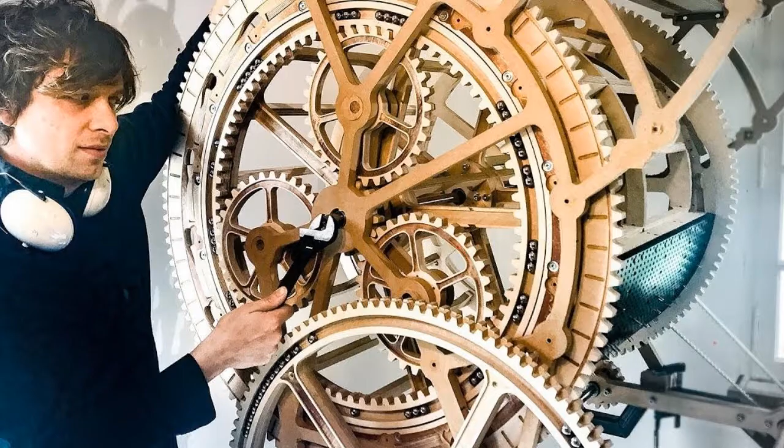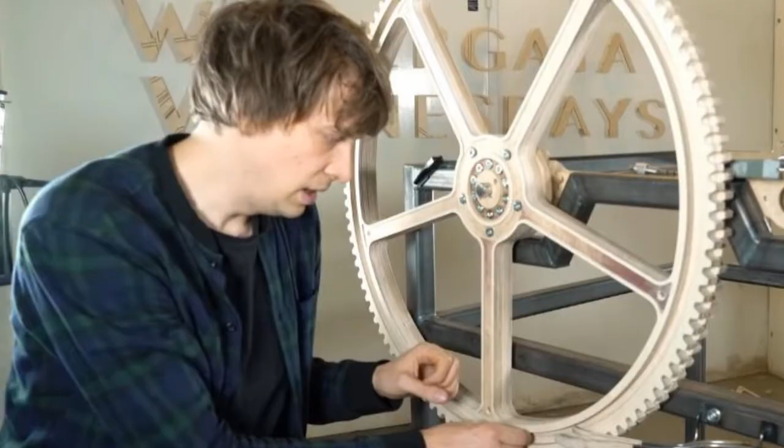A man named Martin Molin is creating a music machine, and he cut gears out of plywood. To make them more decorative, he cut along the spokes of the gear to the depth of the first layer of plywood in order to expose the glue layer, thereby creating gears with some color and texture. This video shows how you can do that type of decorative cutting with MillWrite.

On the drawing screen is the gear and spokes that I created in the previous video. To make this gear more similar to Martin's gears, I will change the spokes to 5 wedges, and I'll alter a few other parameters. Although I will leave the spokes with a taper because I think that looks better, and it might create a stronger gear also.

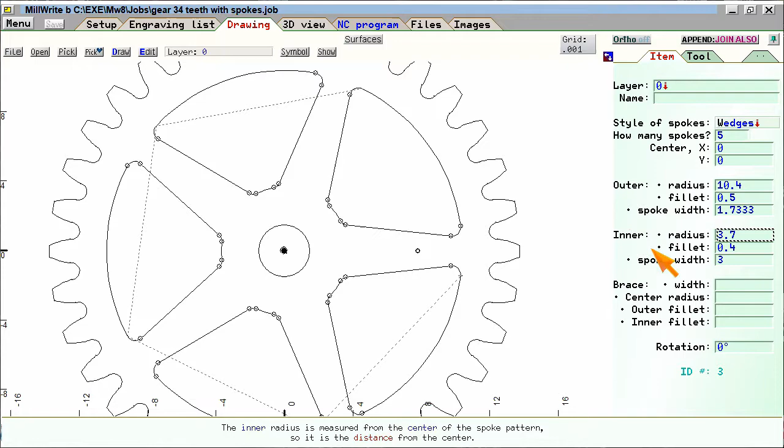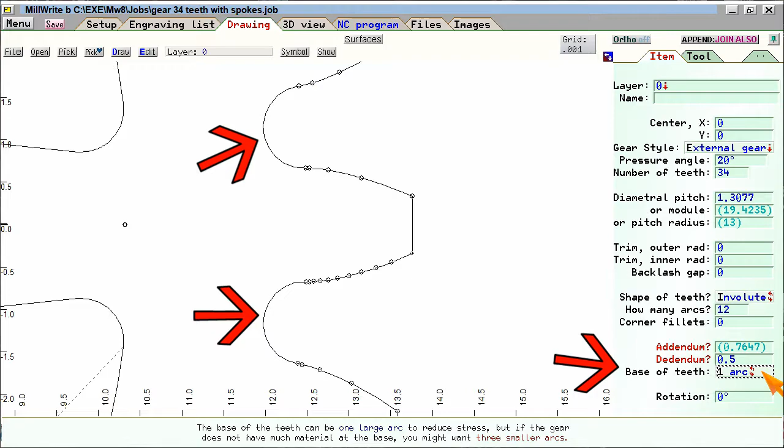I will also make a change to the gear that you might want when cutting a gear out of soft materials like wood. I'll zoom in on the teeth and then change the base of teeth from 1 arc to 3 arcs. As you can see, as I switch this option back and forth, switching to 3 arcs leaves more material around the teeth.

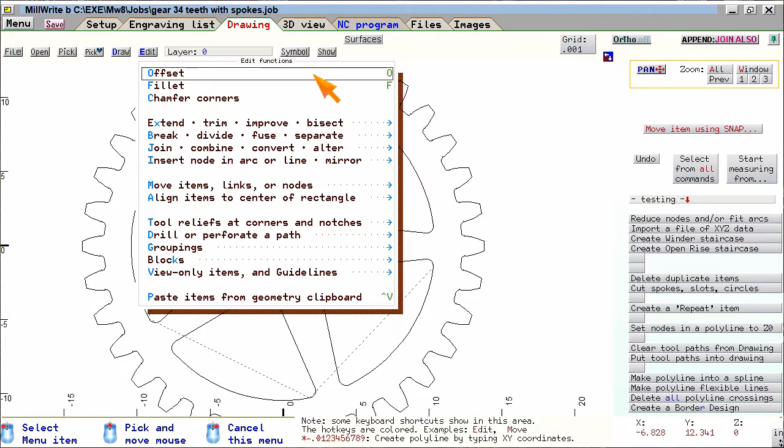Now to create a decorative cut inside the spokes. The easiest way to do this is to make an offset of the spokes. To do that, I can click the Edit button at the top of the drawing page and select the Offset function. At the right edge of the menu is the letter O, which shows that the letter O is the hotkey for that function. Therefore, I could have pressed the letter O on the keyboard to bring up the Offset function. The top of the screen changes and offers the option of offsetting entire polylines or individual links within polylines.

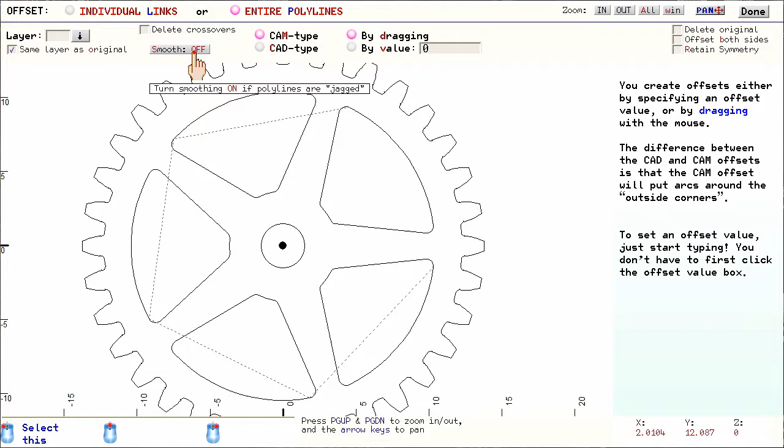I want to offset the entire polyline, and I want the CAM type of offset. I do not need to worry about deleting crossovers or turning on the smoothing option because these are precise drawings as opposed to the sloppy geometry that we get when we do those raster to vector conversions in which an image is converted into geometry. I will put the offset on a different layer, and I'll give the layer a name such as offset of spokes.

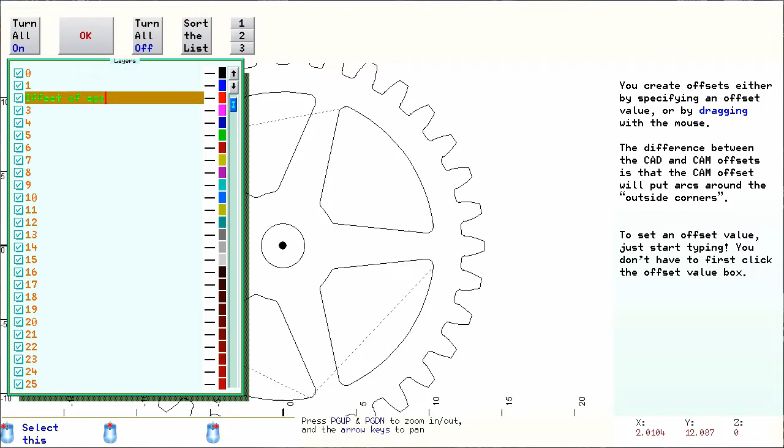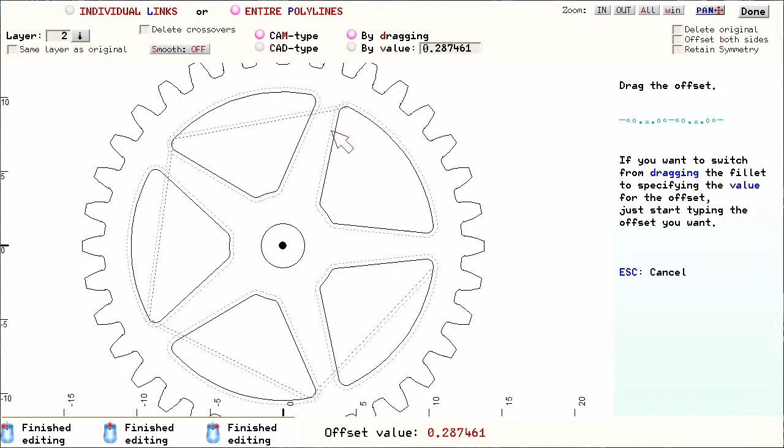I will create the offset by dragging it rather than by value because I don't know the value I want for the offset. So I click the spokes and then move the mouse, and you can see that it is dragging an offset. I can zoom in or out with the scroll wheel while I am doing this. As I drag the offset, the value is displayed at the top of the screen.

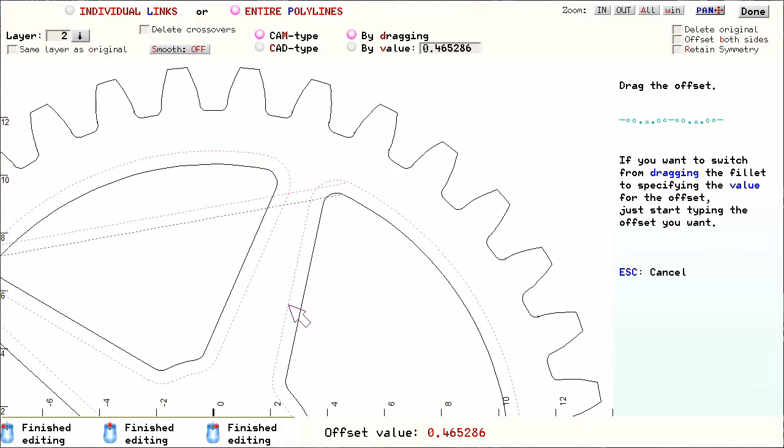If I decide I want a specific value, I can do it while I'm dragging the offset simply by typing the value. For example, if I decide I would like the offset to be 0.4 inches, then I type 0.4. As soon as I press the decimal point key, a window pops up to ask me for the offset value, and then I can press the 4 key and then the Enter key. Then the offset is created at exactly 0.4 inches.

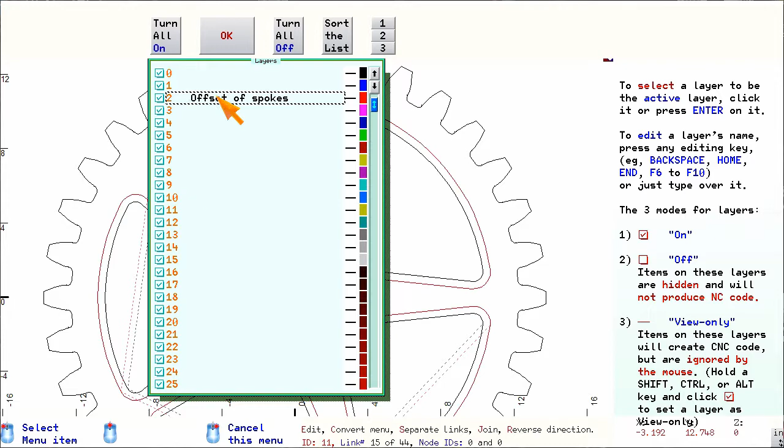In order to make the tool cut in this area, we need to create a boundary to tell the tool where it must stop cutting. I will create a circle to specify the outer boundary. I want the circle on the same layer as the offset, so I'll set the active layer to the offset of spokes. Then I click the right mouse button while the mouse is not hovering over anything, which brings up the drawing menu, and I'll pick the option to draw a circle.

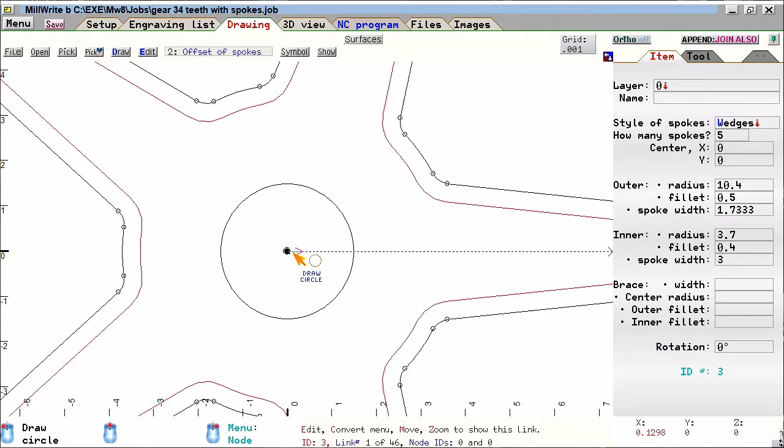Then I click the center of the spokes and drag a circle out to where I want the tool to stop cutting. This looks okay. Now I will create a smaller circle to stop the tool from cutting all the way to the center. So I click the center of the spokes again, but this time I make the circle stop about here.

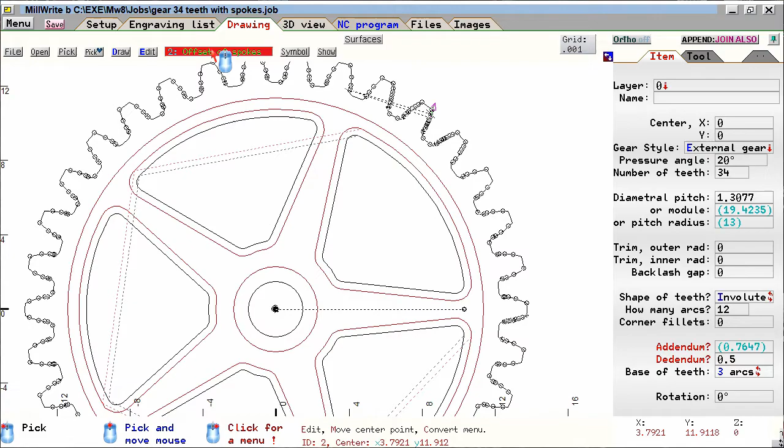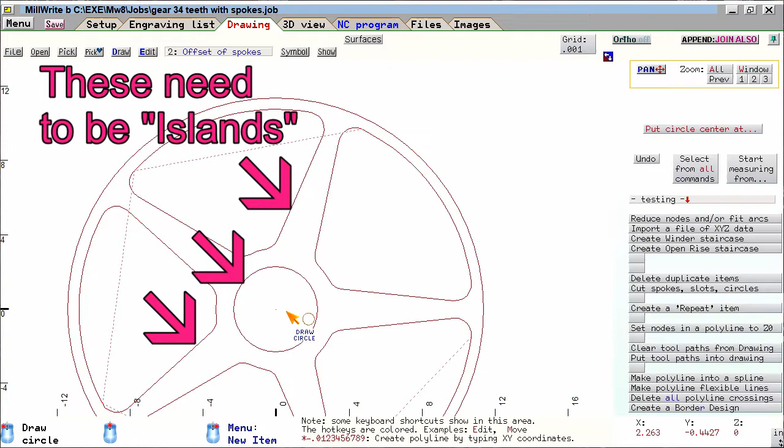The spokes and the gear are on layer 0, so I will turn that layer off temporarily to help you understand what I'm doing. I want the tool to cut within this area, but not inside these 5 wedges. To do that, these 5 wedges need to be set as an island so that the tool avoids them. The center circle also needs to be an island so that the tool avoids cutting into it. The outer circle needs to be set as a pocket. So I will let the mouse hover over the outer circle and then set the cam operation to pocket.

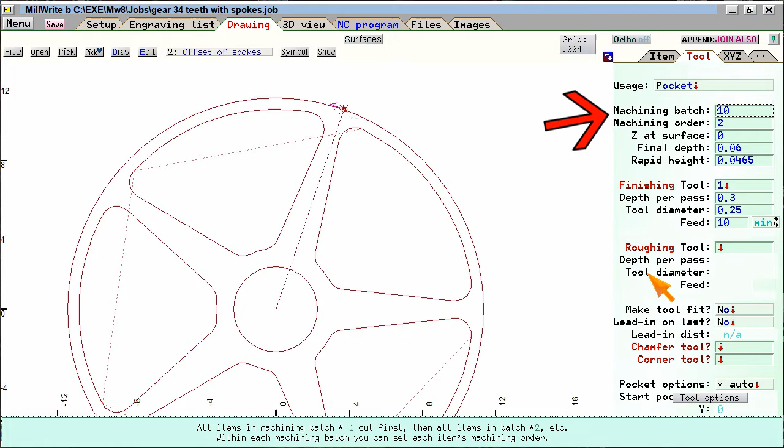I will select the same 1/4" tool that I chose to cut the spokes and gear. However, the depth will only be as deep as the first layer in a sheet of plywood, which I will assume is 0.06 of an inch. I want the CNC machine to cut this pocket before it cuts the shaft hole, wedges, and gear, so it needs to have a machining batch with a lower number than the other items. Since the shaft hole is set to a machining batch of 10, I will set this to a machining batch of 5.

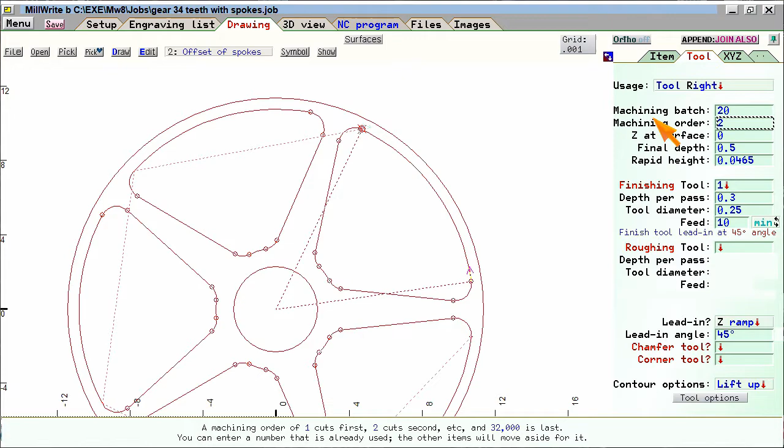Now I need to set the circle and wedges to islands. In the previous video, I showed that you can switch from one item to another by moving the mouse back into the drawing, clicking one time, and letting the mouse hover over the other item, and then sliding the mouse back over to the right side of the screen. Going back and forth like this is a bit of a nuisance, however. There is an easier way to switch from one item to the next.

I will go back to this outer circle. Then I press and hold down a Shift key on the keyboard, and a menu appears on the bottom of the screen to remind me that while I am holding down the Shift key, if I use the mouse scroll wheel or the page up or page down keys, I will jump to one of the other items that is visible in the drawing. So I turn the mouse scroll wheel and the outer circle becomes unselected and the spokes have been selected.

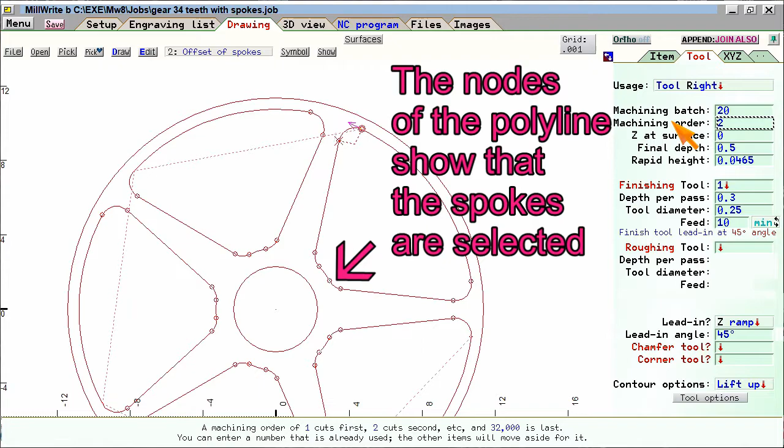I can now set this to be an island, and I give it a machining batch of 5 because it has to match the batch of the pocket so that MillWrite knows that the pocket and island belong together. I could now press the Shift key down again and use the mouse scroll wheel to jump to the inner circle, and then set that to be an island and give it a machining batch of 5.

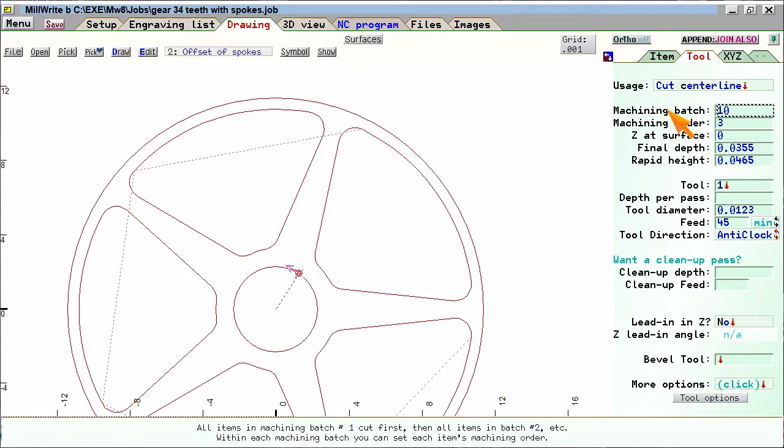But another method of giving items the same machining parameters is to use the Copy Cam Settings function. I could set one of these user-defined buttons to Copy Cam Settings, or I could click the Select from All Commands button, and the first option in the list is to copy cam settings to others. So I pick that function. I make sure the machining batch option is checked at the top.

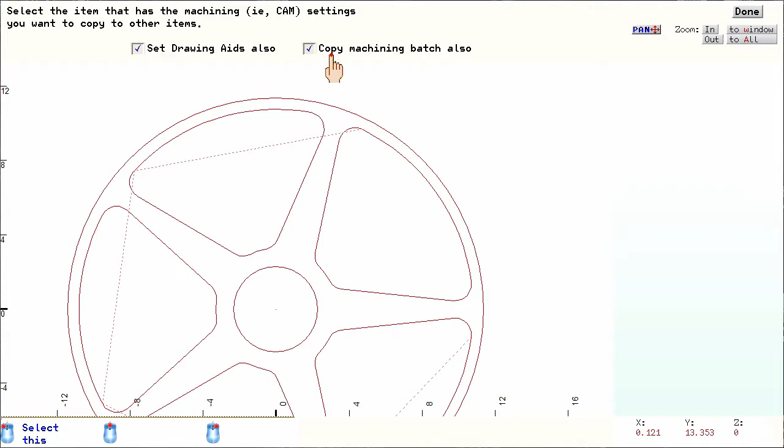The message at the top of the screen reminds me to select the item that has the cam settings I want to copy. So I move the mouse over the spokes, and along the right side of the screen I can see that it has been set as an island and machining batch 5. So I click the left button to let MillWrite know I want to copy those settings.

The message at the top of the screen changes to tell me to click the items I want to have the same settings, or draw a box around them if I want to set a bunch of them. So I click the circle, and now it has been set as an island and machining batch 5.

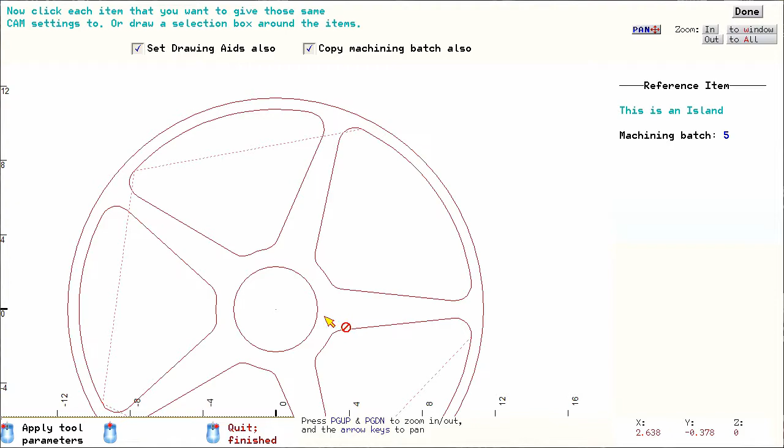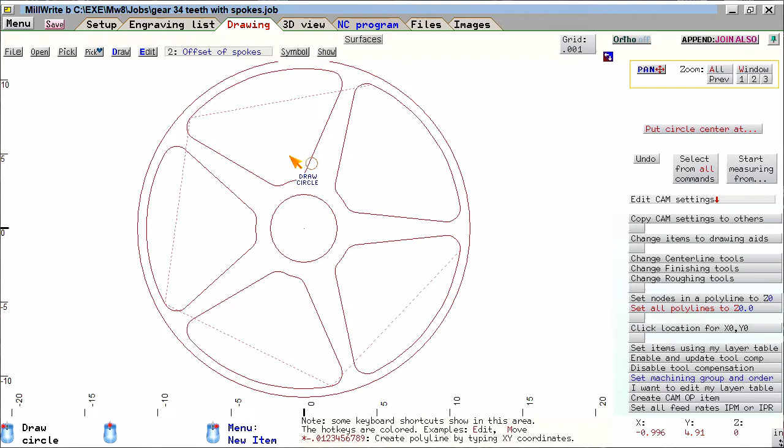Cutting this gear out of a piece of wood and cutting 5 wedges into it is going to create a total of 7 independent pieces of wood, which must be held down on the table. One option is to drill holes through each of the 5 wedges and through the gear, and then bolt the sheet of wood to the CNC table. However, there is another method, and that is to place holding tabs on the pieces to hold them together.

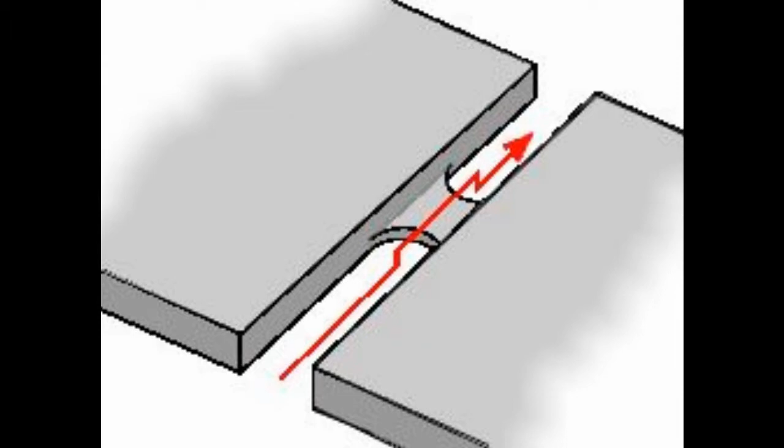When the CNC program has finished cutting, all 7 pieces will be cut out, except that there will be some small tabs of material holding the pieces together. You'll have to cut those by hand to release the pieces. The tabs will cause the tool to rise up in the Z-axis for a short distance, move over in the X and Y a short distance, and then drop back down, thereby leaving a small piece of material to hold the pieces together.

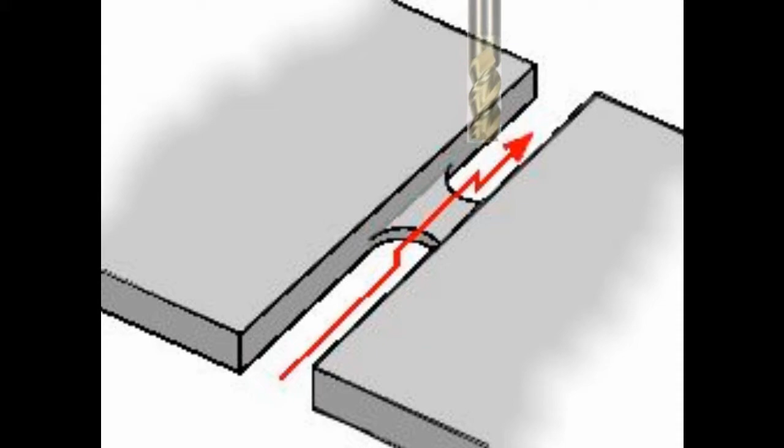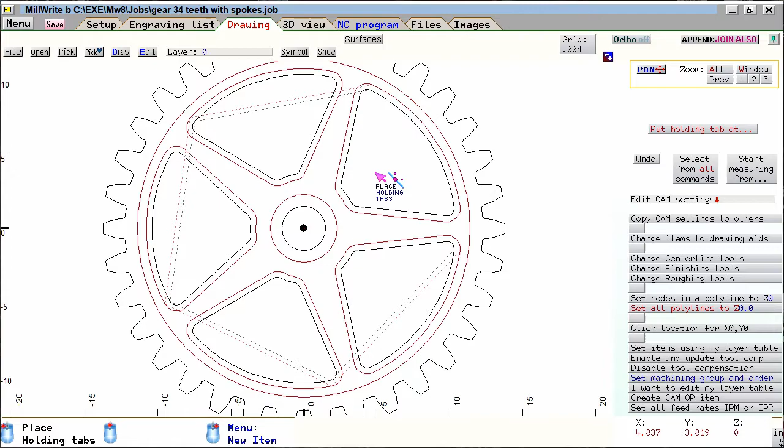To put these holding tabs on the part, click the right mouse button when it is not hovering over anything in the drawing, and the menu will appear. Select the option to Create Holding Tabs. Then click the location on the wedges where you want a tab to be. Wedges that are this large might need 2 tabs. I will also put a tab at the center of the hole, and I'll add 3 tabs to the gear.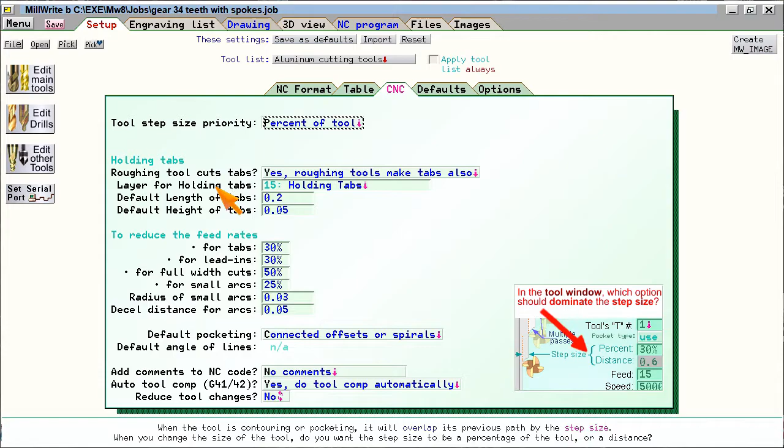The size of the tabs are specified at the setup page under the CNC tab. Here is where you set the default length in X and Y and the default height in the Z axis. At the drawing page, you can override the height and length of the tabs if you discover that a particular tab needs to be stronger or that it can be reduced in size.

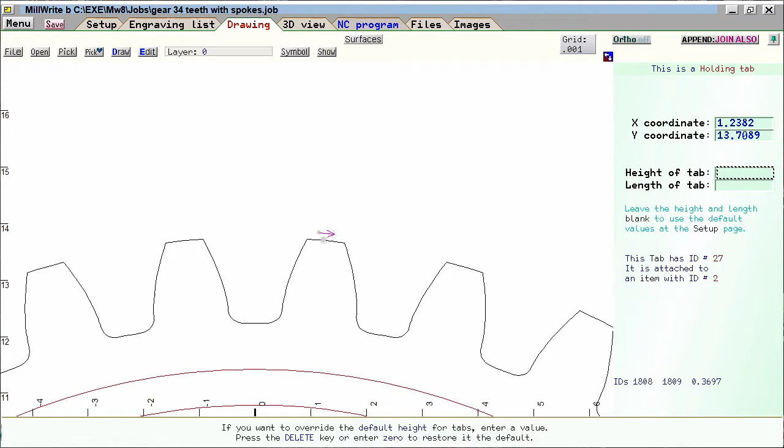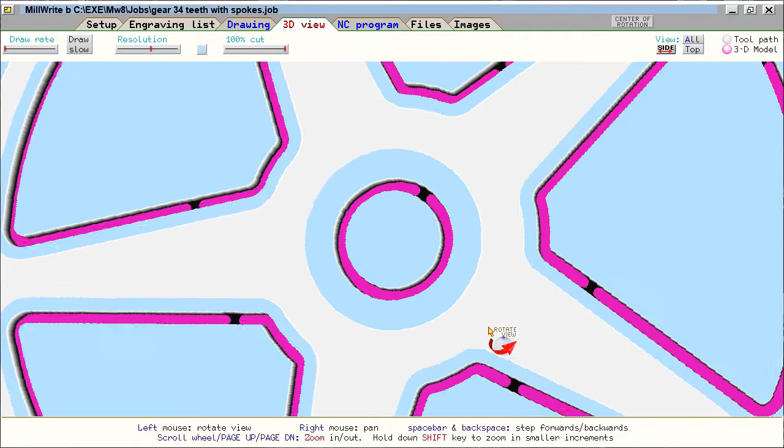After the tabs have been created, you are ready to look at the 3D view of the toolpath. You can see the tabs if you zoom in. You can switch to the 3D model to get an idea of what the tool is going to create. The pinkish color shows where the tool has reached its deepest level, and the tabs will show up as small dark areas because they are above the deepest level. You can flip the 3D model upside down to get a different view of the tabs.

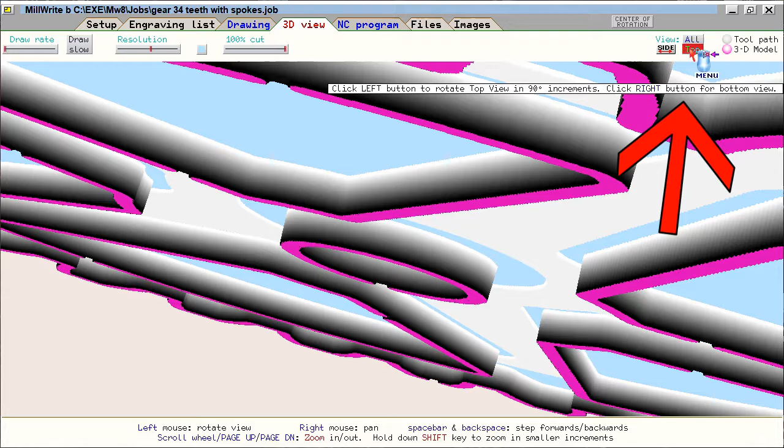You can also flip the model upside down by clicking the top button with the right mouse instead of the left mouse. If you let the mouse hover over the top button for a second or so, the help message will remind you of that. If everything looks okay, switch to the NC program page, and there is your CNC program. It is ready to send to your CNC machine.